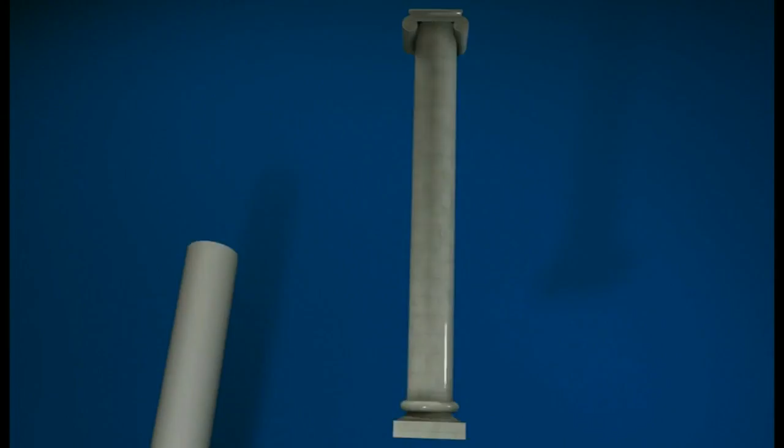This is, I hope, an interesting story of one of the research projects I'm currently working on. There are three aspects of research we're trying to do on this project. The particular one I'm going to talk about is how we're trying to integrate building information modeling with sustainable design.

The case study we're working on is a retirement home for a locally, actually nationally, renowned architect named Derek Latham, whose concept for the building is energy plus, carbon negative, and an autonomous house. I won't go into detail about the level of autonomy we will achieve, but if you find it interesting, please feel free to ask questions.

The context for today's presentation is really to look at going beyond level 2 to level 3, trying to understand from a research point of view how we could integrate building information modeling with real-time building performance. So how do we create a link between the two? There are obviously many bespoke systems on the market, but very few are integrated with mainstream BIM technologies.

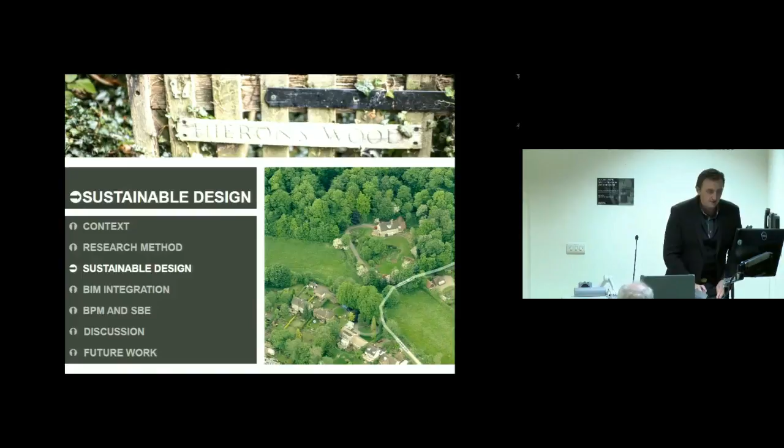The building, which I'll talk about first before we move on to the main parts, is situated in Little Eaton, which is, as you can see, a quintessential countryside setting on the edge of the Peak District, which is the second most visited park in the world, from what I know.

Please note all of these woods here - this is the existing house, and we are building here. We've been building for now over 23 months. But all these woods here actually belong to the original house.

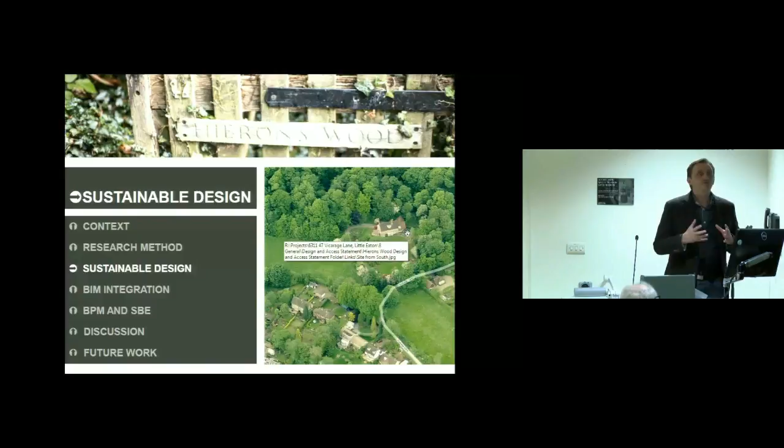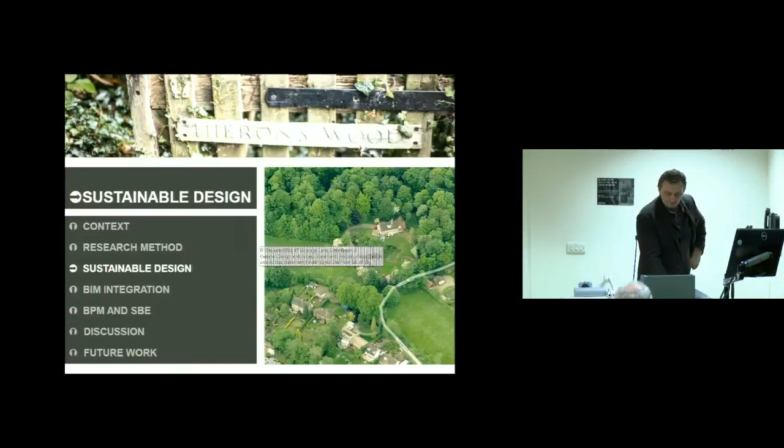The building will actually be situated, as I said, on this location here, where there was formerly a greenhouse, or a greenhouse foundation. Very much in terms of both roof line and sight lines, as well as in terms of the concept, we're trying to be contextually sensitive and work with defining local characteristics, in line with the paragraph 55 project, basically.

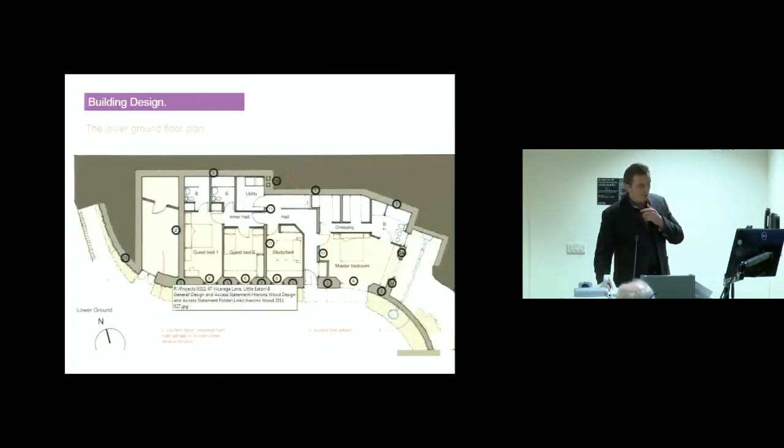It was very, very important to design something that was non-intrusive to such a beautiful context. So you'll see a quick mock-up visual in a couple of slides, but just to understand the house proposal quickly, it's an upside-down house, so sleeping accommodation is on the ground floor.

Each of the bedrooms has its own suite, with the circulation area leading to the staircase going to the first floor. This is the plant room, and de facto the garden store.

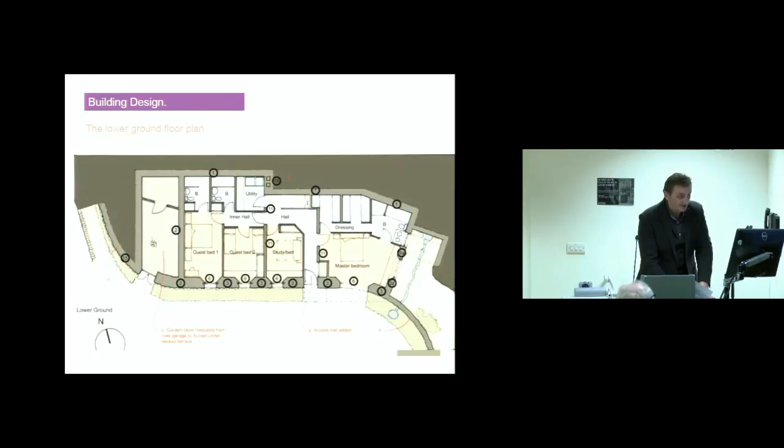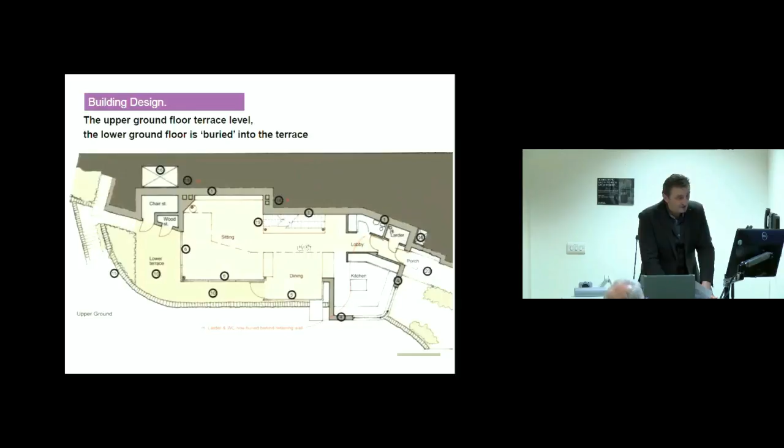Moving on to the upper ground level - we call them lower ground and upper ground levels, rather than ground and first floor - leading onto a quite open plan organization with a staircase leading to the next level, which is a mezzanine level office, and de facto the sitting, dining, and kitchen area all put together.

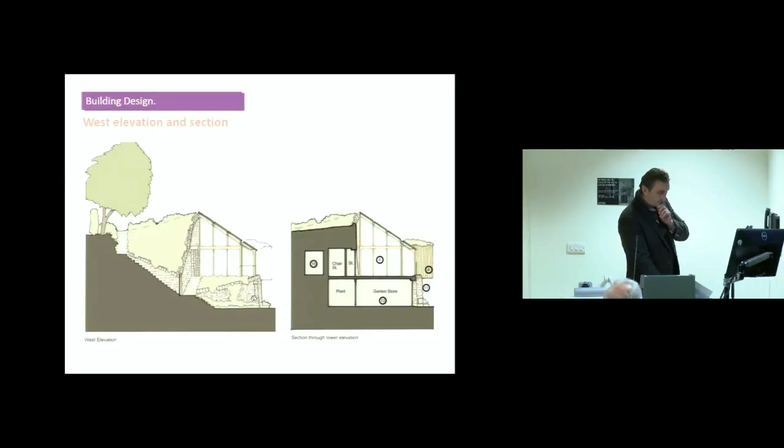As you can see here on the northern side, it's actually a walkable roof. So this part of the roof is walkable. There are no windows on the northern side. This is a 7.8 meter concrete retaining wall connected to the raft foundation, as you're going to see in a couple of images, and you can also see it in the section.

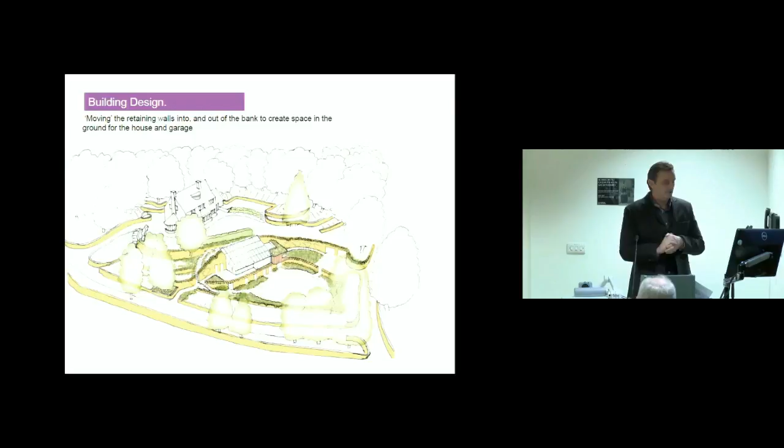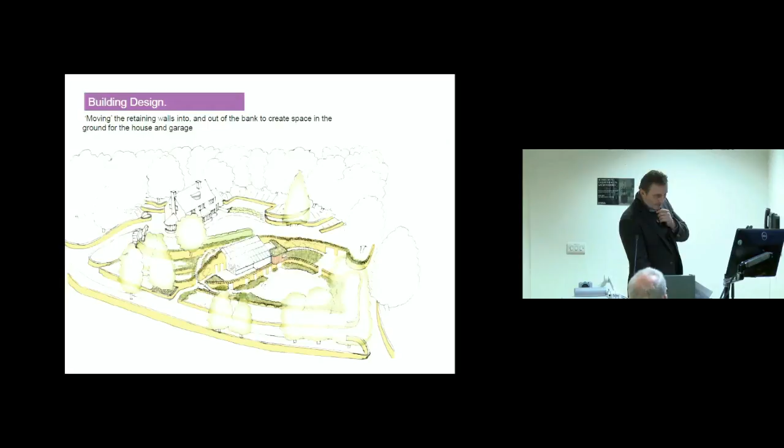That's a more artistic impression of what we are aiming for. Some of these things have changed. This was originally supposed to be a roof made of aesthetically equal panels combining skylights, solar hot water and PVs. At the moment we no longer need solar hot water, i.e. we will be able to get all our electricity needs purely through electricity generation, and all our heating needs purely through electricity generation too. So this will be a combination of PV and skylight panels of equal aesthetic value, and notice how it blends quite nicely into the landscape.

There are three key areas of research we're looking at here, in order of importance. The first one is using sycamore as a structural material, because currently building regulations do not allow sycamore to be used as a structural material due to its perishability. We feel it can be. We've worked out its mechanical properties, which are actually on a par with oak.

It is a hardwood. The problem is it's a very perishable timber if its moisture content is increased or kept in prolonged periods over 20%. So detailing out any prolonged contact with high humidity environments, and monitoring regularly what the moisture content of the sycamore is, is the way we're going to approach this project.

I wish I had photographs out, because we just laid out all of this structural timber frame, but I put this presentation together before I took the photograph. I can send it to anybody who would like to see it. So obviously that's research in its own right, because we want to see how the sycamore will perform.

The reason we use sycamore is, by the way, connected to the first image I showed you. All those woods are sycamore woods, which we thought would be great to use in terms of the local sourcing of materials, and also to allow some arguably more noble species to get a go, since sycamore is actually quite an invasive type of species.

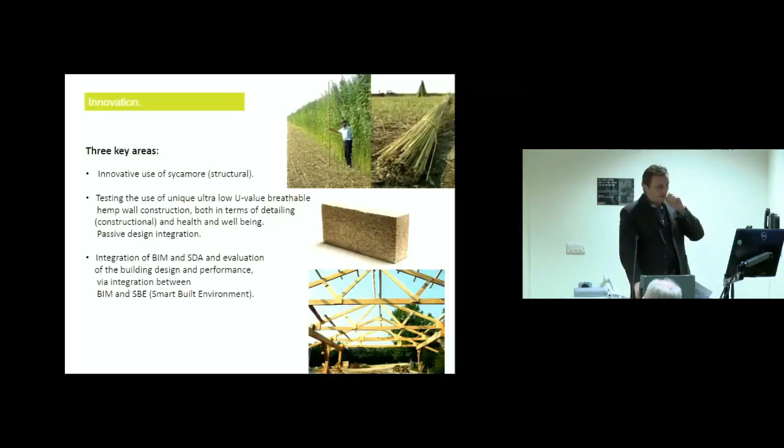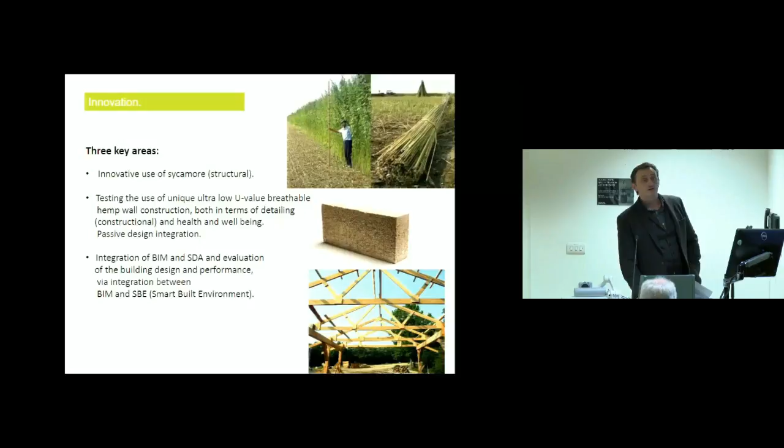Also, we're using dry stone walling, which again is very useful for us because the whole house sits on a disused quarry. So basically, when we're talking about local sourcing of material, it doesn't get much more local than this. And we're using hemp walls, which we originally wanted to grow next door in agreement with the farmer. For practical reasons we had to move to a commercial company for supplying the hempcrete, but the transport is about 18 miles, so it's fairly local.

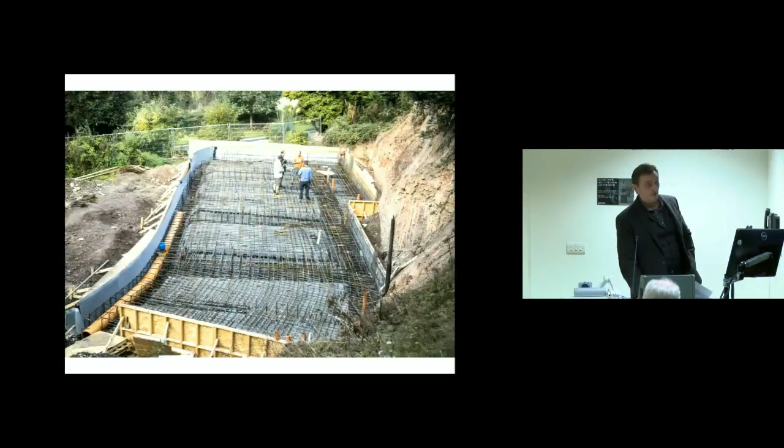Early image on the side, cut into the side of the garden, ground floor slab or raft foundation prepared for ground floor slab casting, walls going on the side. This is the 7.8 meter retaining wall.

It looks quite imposing, but as you've seen from the image mock-up, the whole thing will come quite nicely into context, because half of this is missing, and you won't be able to see any concrete, because there will basically be dry stone walling in front of every single piece of concrete. So actually, we won't know about the concrete. Yes, we use lots of concrete.

One of the questions we often get is, well, what about local sourcing of materials if you use that much cement in the concrete? True, we've got obviously thermal mass, but also what we have done is specify an 80% GGBS concrete. At the time of the markets, we could not find a greener product. So I don't know whether a higher possible replacement exists, but that's the highest we could find at the time, and that's what we've used in terms of cement replacement.

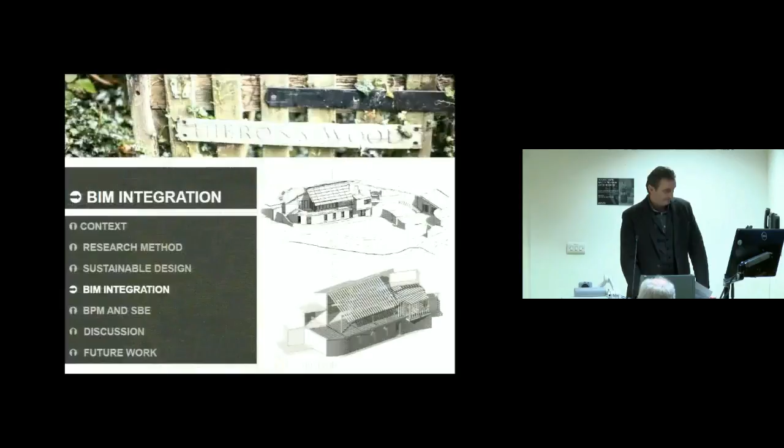In terms of the BIM integration, this is probably the key slide for this presentation.

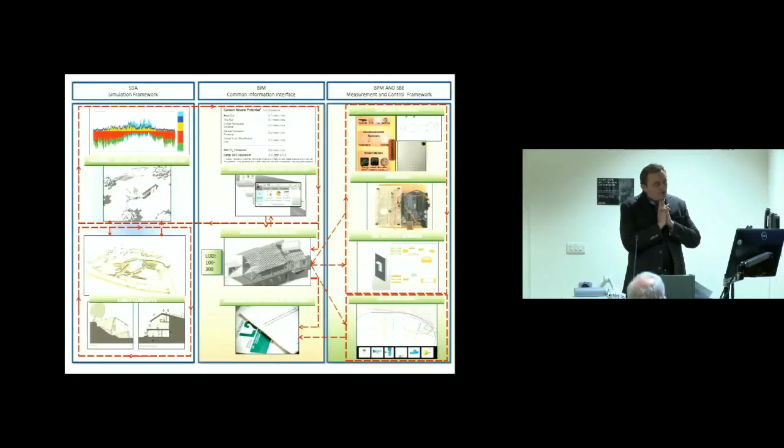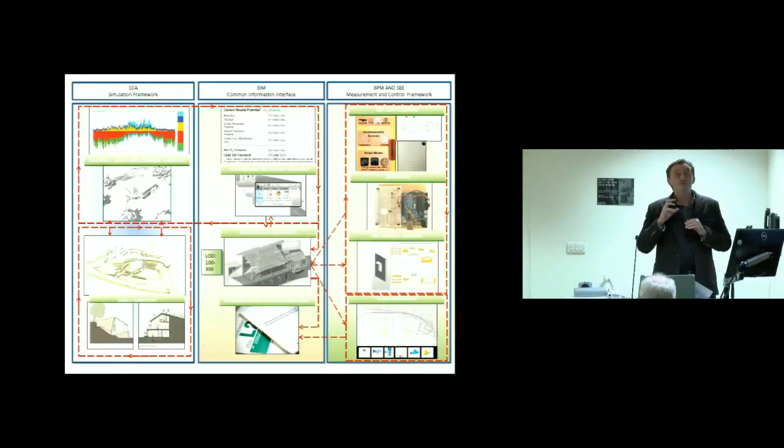What we try to do is integrate the concept of something I've been doing research on for some years now, published in one of the architecture technology books, of sustainable design analysis, where I define that as not what we do on the Part L end, but something we should be doing more in terms of rapid and quantifiable, next-day design meeting feedback within the office. So how do we train professionals?

My argument, as you'll see in this presentation, is that architecture technology students, or architecture technologists, are ideally suited for this. What kind of professionals do we need to train to give quantifiable feedback to some of the qualitative design thinking that can be employed next morning in terms of decision making? I mean literally, what happens to the building in terms of solar gains if we rotate it 15 degrees on the side?

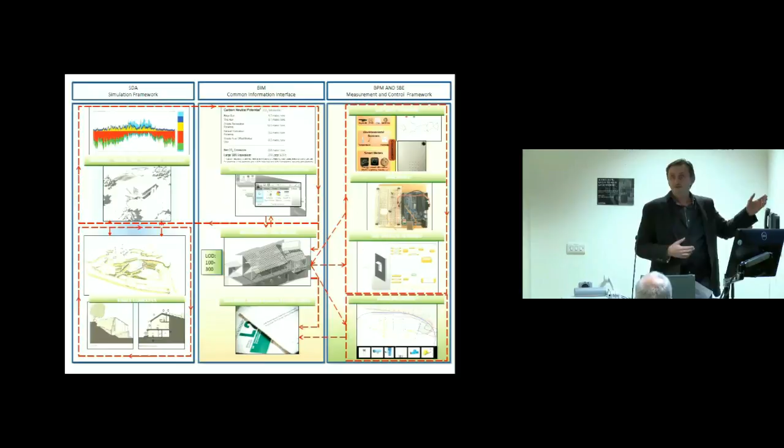I can't be going to Part L consultants every time I have a question like that, to pay them £700 or £800 or £1,000 and then wait 2 weeks to get results. We need to get those kinds of feedback within the office.

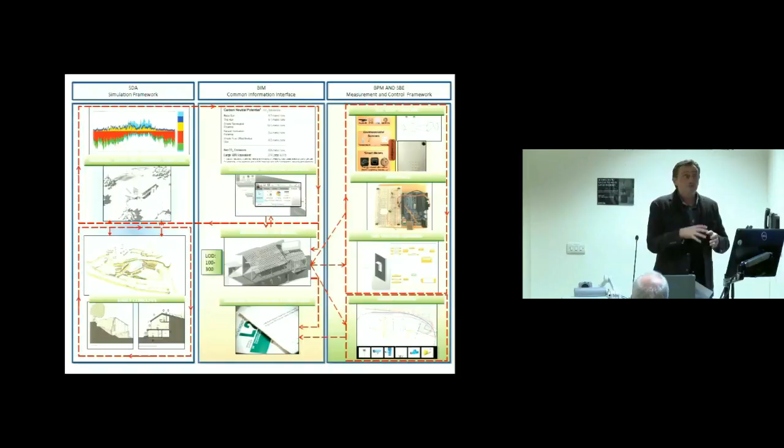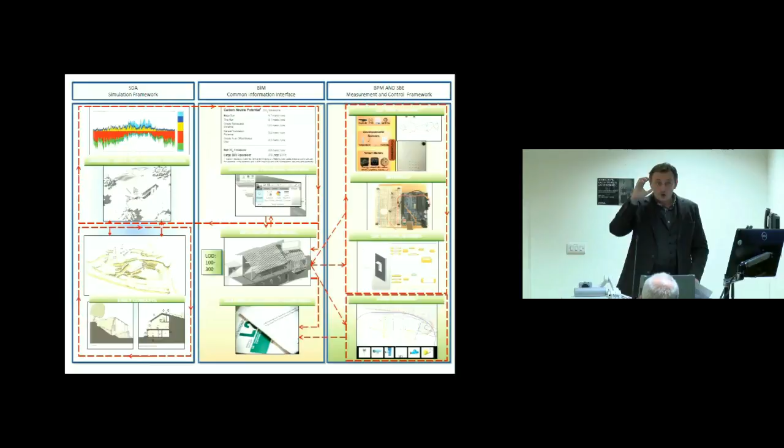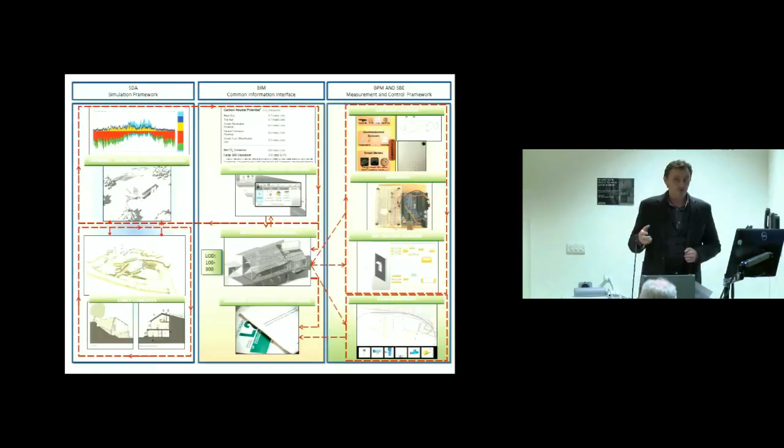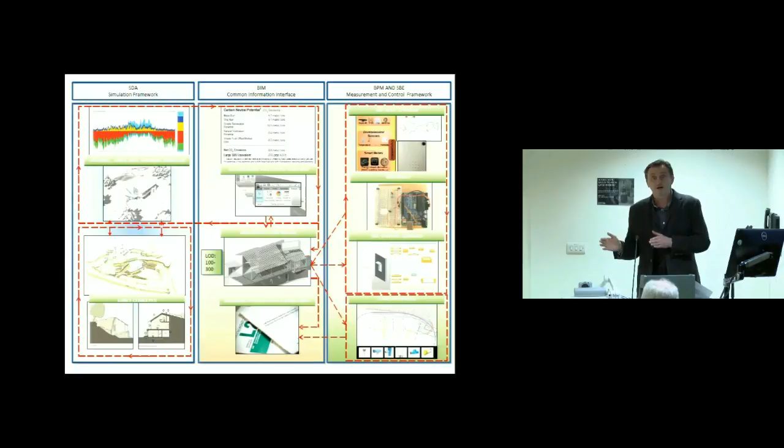We all know that decisions made early in design tend to have the highest cost impact, i.e. the cost of making those decisions is lowest, but the actual cost impact could be highest, and that fastly diminishes as we progress through design. So ideally, we should be making the most important decisions as early in design as possible. That doesn't happen at the moment, because most of us do Part L compliance 2 or 3 weeks before we go to site, or a week before we need building control approval. So however good or bad it is, it's too late to change anything.

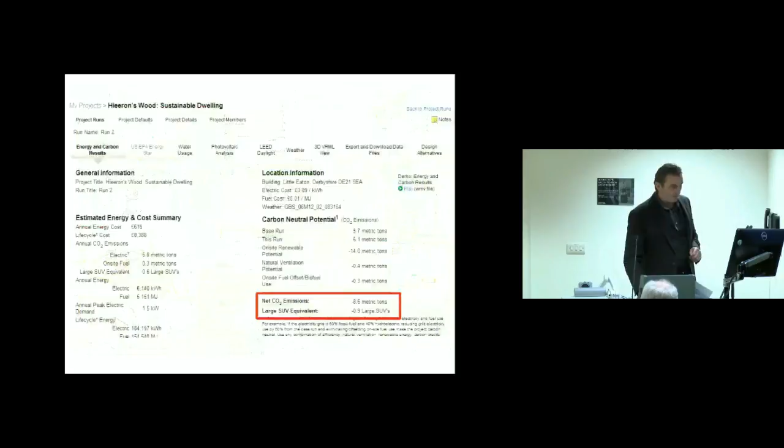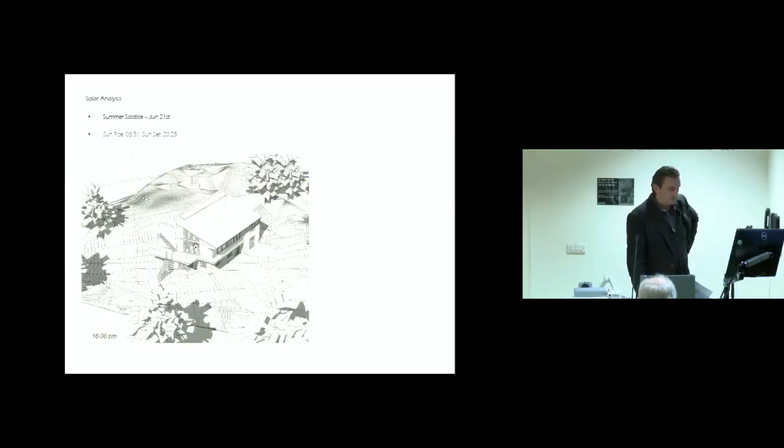So we have undertaken full analysis, looked at the carbon neutrality of the building, looked at the solar gains and general solar analysis. Notice this west-end window, because we noticed it's obviously vulnerable, and that's a part of the project we're going to consider in terms of the BIM integration.

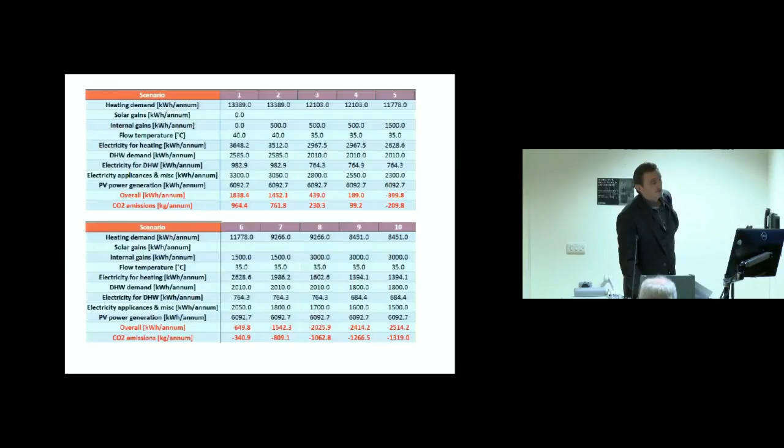Light level analysis, temperature profiles in buildings. We also did, rather than just trusting software, calculations from first principles. So basically, working with Valiant, we did calculations of key aspects of performance.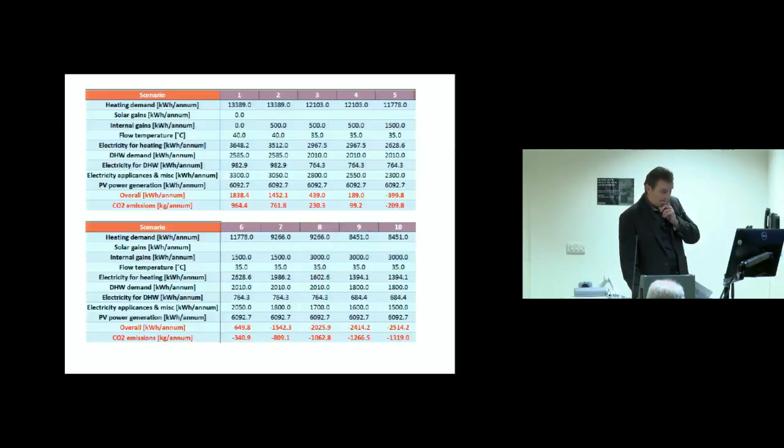You'll notice here we had 10 scenarios depending on what flow temperature of air-to-water heat source pump we use, dropping it down from 40 to 35 degrees. We have managed to get ourselves into both the carbon neutral region, i.e. numbers are negative here, and also, because we are generating 6,093 kilowatt-hours of PV generation, we've managed to get into an energy-plus position, i.e. creating more energy than we need and exporting it back to the electricity network.

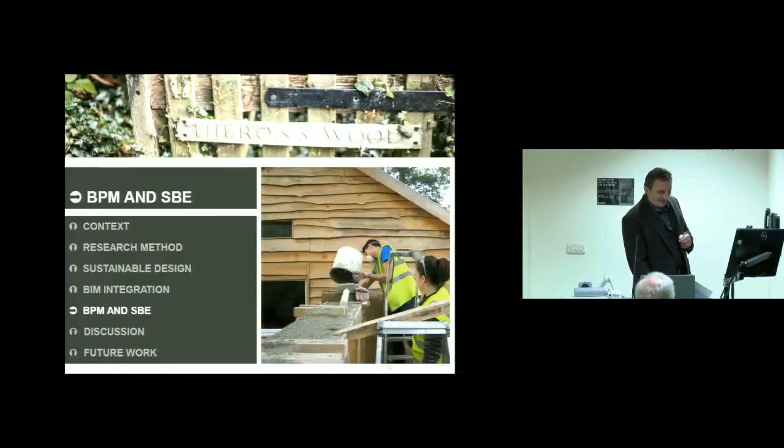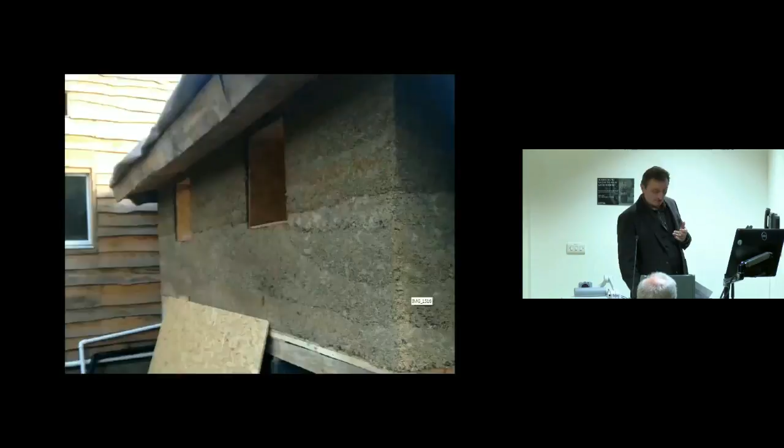We've also gone with the students and built a small-scale building. These are some of my master's students, some of them here. Actually, one of them is now working for Kingspan - Claire. We designed and built it together with the students over 2 or 3 days, using hempcrete, exactly the same construction. Half of the construction is a sycamore frame, half is a normal traditional softwood timber frame, and we are now currently doing measurements and comparing the two.

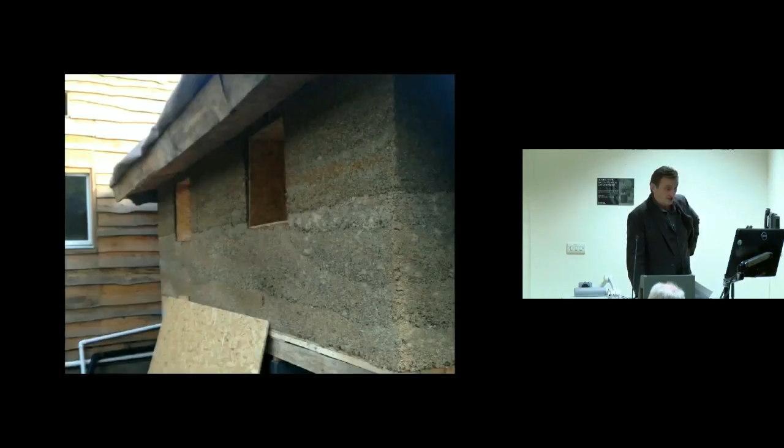So you can see some of the images of the work. There's the shuttering taken off. This is a test building de facto, lime rendered on the outside. Measurements include relative humidity, temperature, and moisture content.

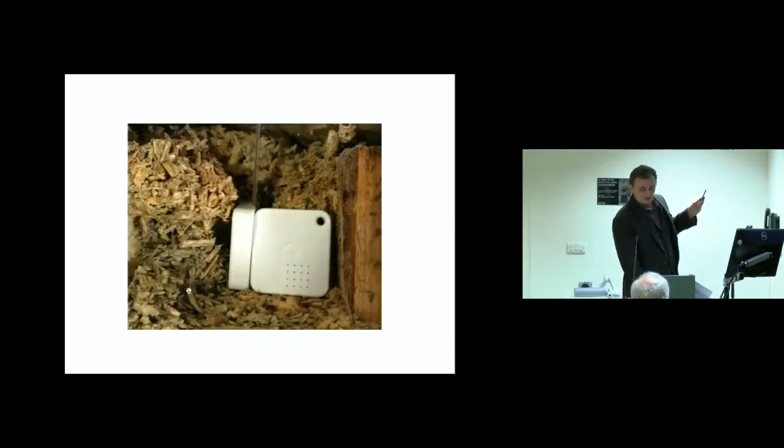We literally track it on the mobile. Each of these sensors costs $7, so there are very few excuses now for us not to monitor buildings anymore. We can get these technologies for monitoring, for example, in the range of $100 to $120, and monitor wirelessly the whole building in terms of key parameters: temperature, relative humidity, and moisture content. We should be doing this because the performance gap is still too big.

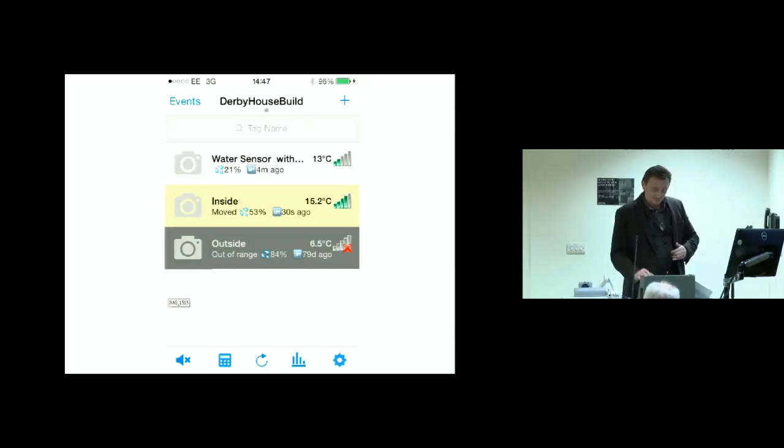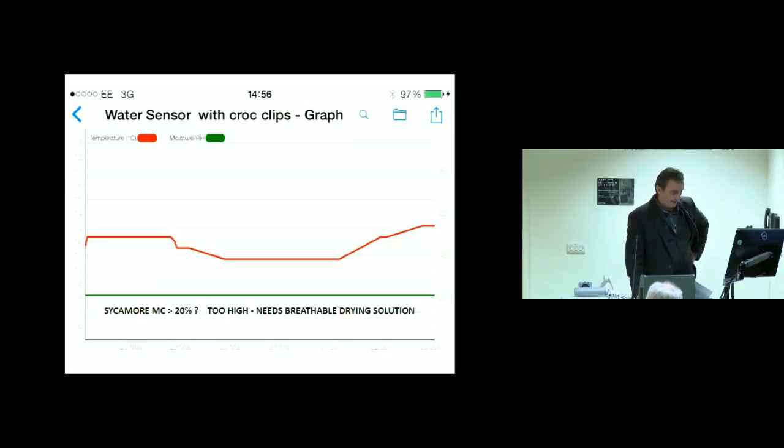In this particular measurement, we concluded that the sycamore moisture content was 21%, which is 1% above what we wanted to keep it - a slight concern.

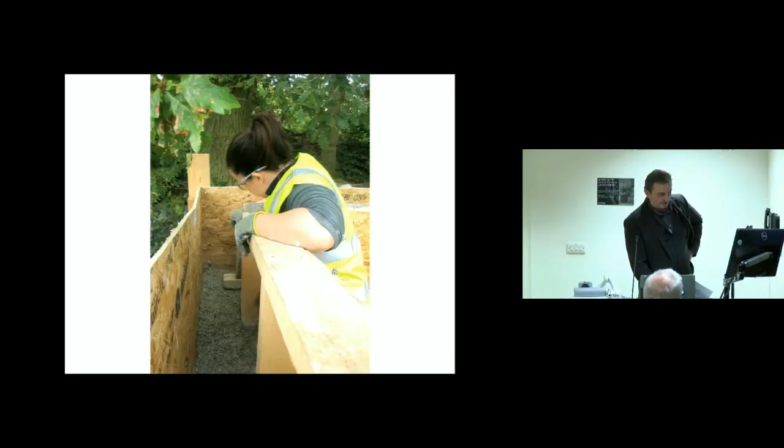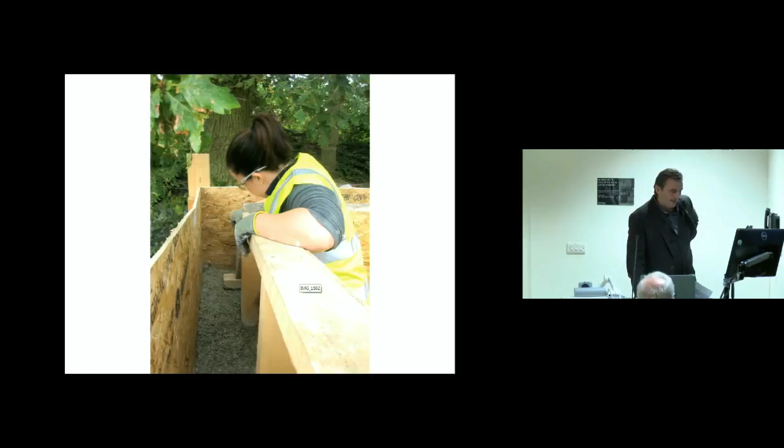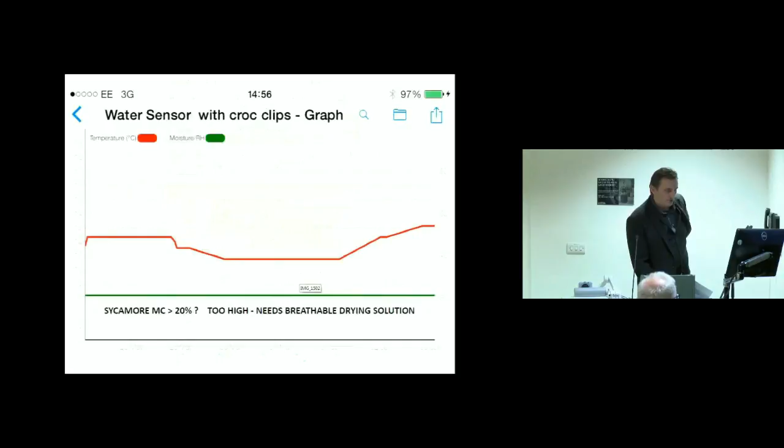We realized that here, as you can see, we got OSB board on both sides. We stripped this OSB board off on the other side, but this is fairly unbreathable OSB board, which we kept on the inside, and they painted it. This is in Hill Holt Wood in Lincoln. They painted it with an equally non-breathable paint, so the wall was no longer able to breathe properly, and that's one of the reasons why the moisture content is slightly higher than we expected.

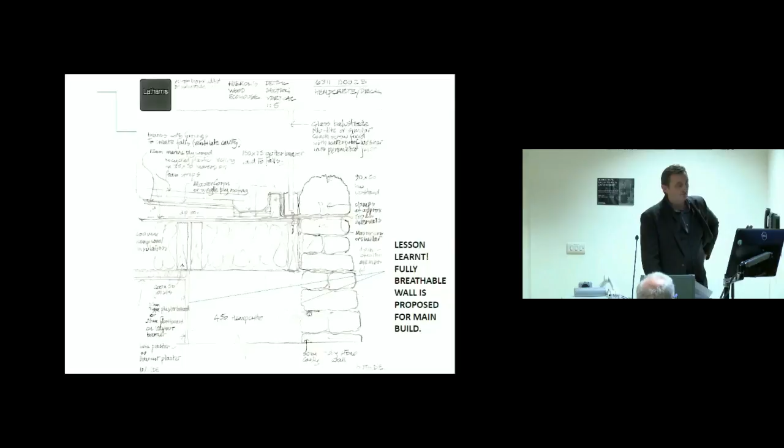So on the final build, in terms of detailing, which is a lesson we learned from this experimental build, we are going for a fully breathable solution. Notice here you've got dry stone walling, hempcrete at 450 millimeters, and then sitting in situ within the hempcrete is the sycamore frame. There are no vapor checks, no breathable membranes, nothing - just a fully breathable wall.

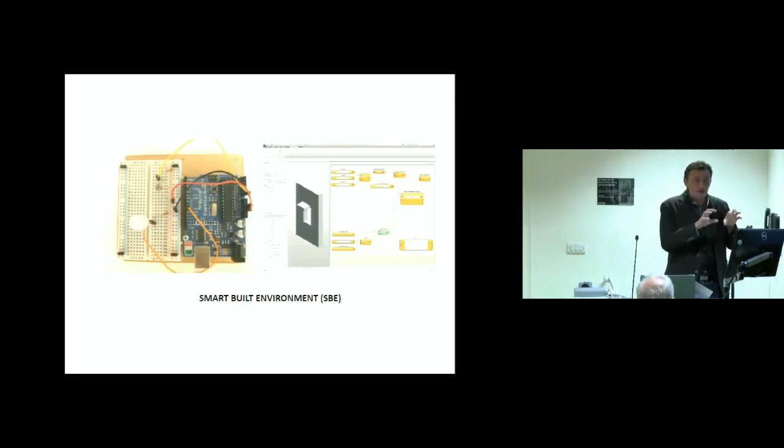Monitoring strategy for the buildings - this is the part in terms of integration. We have managed to work out proof of concept as to how you can model a virtual sensor within the BIM environment and connect it to the real sensor on site, getting information exchange in real time through a BIM platform. We managed to work that out as a proof of concept, and we're now working on how we can apply it further in the research.

So in conclusion, what we found on this project is that knowledge and understanding of sustainable design and BIM integration is still beyond small to medium practices and is not likely to be achieved in the near future. But it's something I feel we should be looking more into, because to close the performance gaps, we should be able to integrate our sustainable designs with real-time performance and close the feedback loop.

Otherwise, we will always have a discrepancy between what we think happens on the desktop and what actually happens in the real world. So we must close that loop, and I feel BIM should be an ideal platform to retain the information in the loop rather than bespoke BMS systems.

Sustainable design analysis does help produce better designs. We have managed to save 30% energy in our iterations alone, but BIM integration at the moment with other systems is neither faultless nor fully interoperable.

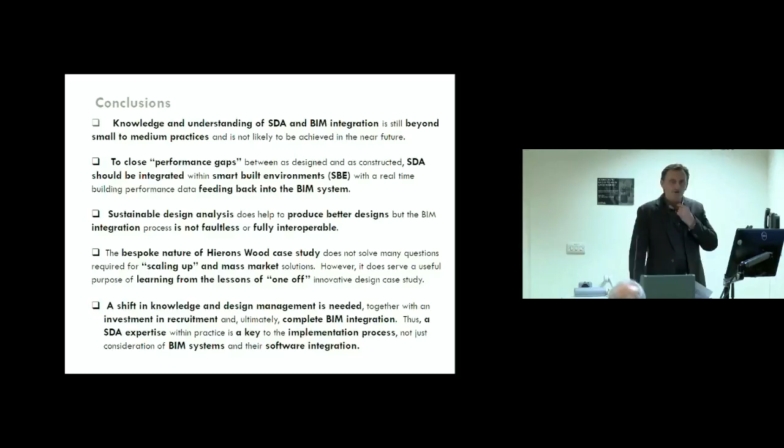This particular project, we do understand, is very hard to scale up because not everybody is lucky enough to source timber and stone from the sites, but we feel it's still, as a one-off project, an interesting one to look at, with some lessons to be learned.

In summary, it is very important to understand, as somebody referred to earlier on, that it's not just about the software integration. More importantly, it is about investment in the shift in knowledge and design management, because for this particular system to work, we have to have architecturally educated professionals with knowledge of sustainable design software in the office, so we can get rapid feedback almost on a daily basis, where key decisions have to be made.

For people interested in this project, what we're going to be monitoring very soon - we'll install some of this equipment. We will be monitoring sycamore performance, very essential for us, because the whole building literally stands on the quality of what we do here. This is a timber frame building.

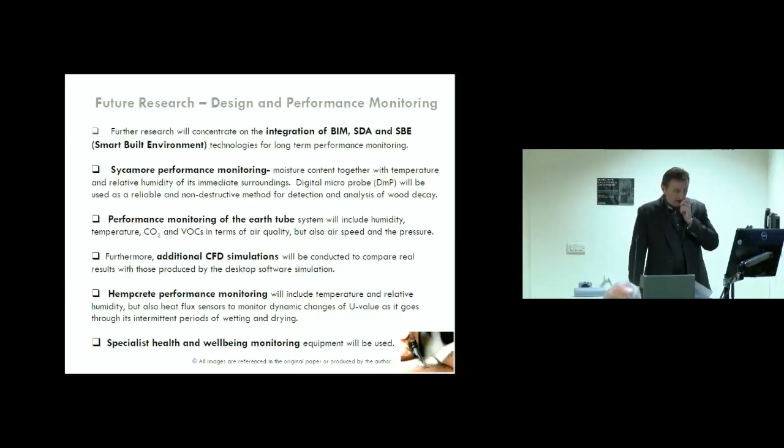We've got an earth tube that is not part of this presentation, but obviously we need to measure humidity, temperature, CO2, VOCs, airspeed and pressure, and do some additional CFD simulations. We also need to monitor the hempcrete, because the sycamore is sitting in the hempcrete, so we need to understand the correlation between relative humidity of the hempcrete itself and the moisture content of the sycamore.

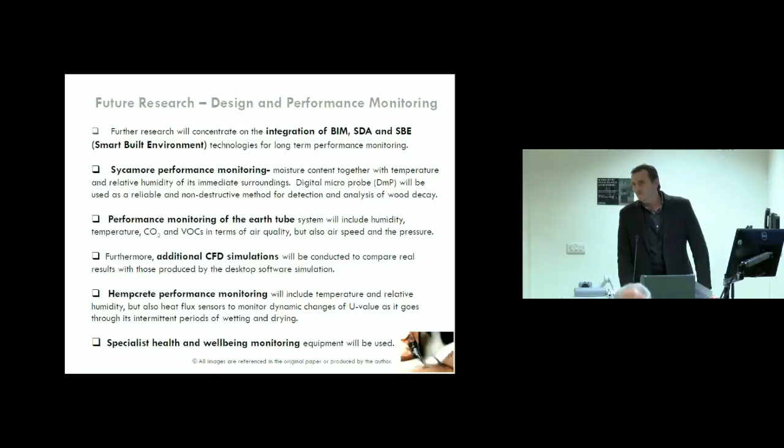We've also used some specialist health and well-being monitoring, because we believe that breathable walls are healthier than non-breathable options. We will see whether we can prove that or not. Thank you.